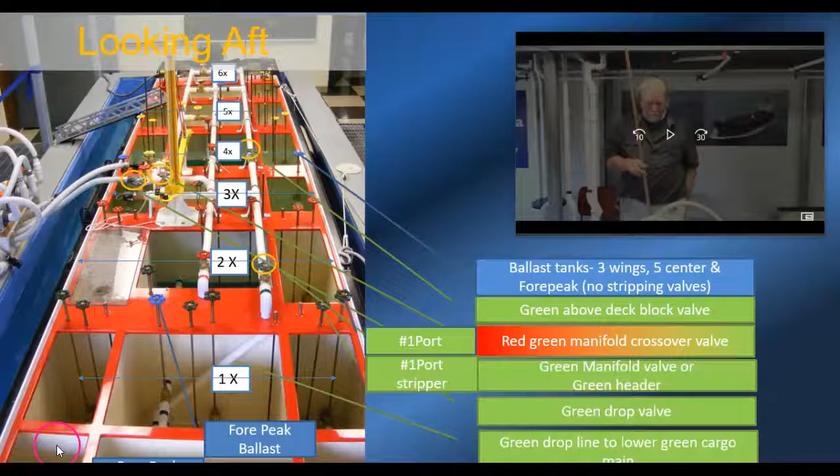Okay, so the first thing we're going to do is open up this valve here, which will supply pressure and allow the cargo to flow from the tank all the way up to this valve here. So again, thinking about pressure.

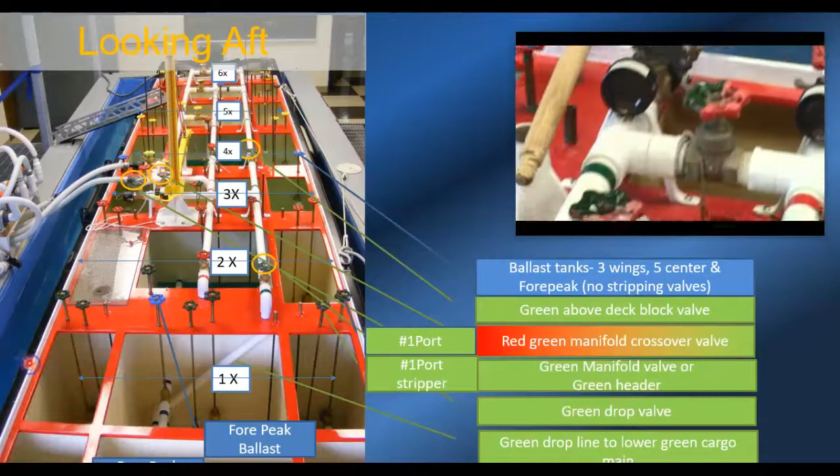Now I want that cargo to flow down through this section of pipeline next and get into here. This is my destination, 3 center. So think about every valve that it hits, because every valve it hits is going to affect the flow of cargo. So the first thing I have to do is open up this valve right here.

Well, it needs a name. We need to give this a name because I need somebody else to open it. I'm not just going to go up there and open up that valve myself. There's a couple of different things we can call it.

First of all, it's green, so we can identify it by its color. Or we can identify it by numbers, working from the bow to the stern, so that could be 1, 2, or 3. But I think you'll find that if you leave it as the green valve, you'll be okay. But the green valve isn't going to tell you enough. This is a specific valve, and it's called the header valve or the manifold valve. Either way, I don't care what you call it, as long as the team knows which one you're talking about. So try to stay consistent.

So this would be the green header. This would be the red header. That would be the yellow header.

Cargo cannot flow. This should actually be the last valve you open up before we start to move cargo onto the ship. This is the connection between the ship and the shore, so until you're ready to flow cargo, keep this valve closed.

So we open this valve. Now pressure is allowed to go shooting down the pipeline until it bumps into another valve. It's going to bump into this valve, come down through here, bump into this valve, and then bump into that valve. So remember, as soon as you open up the street to allow it to go someplace, it's going to go there until it meets resistance. And those valves are going to be your resistance.

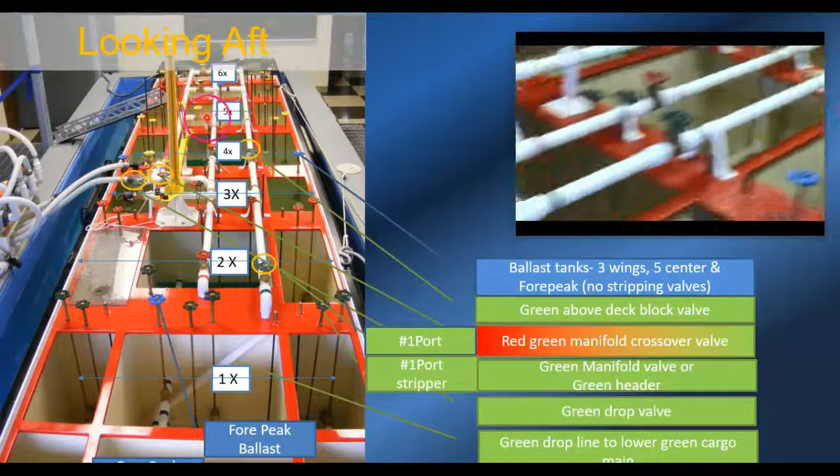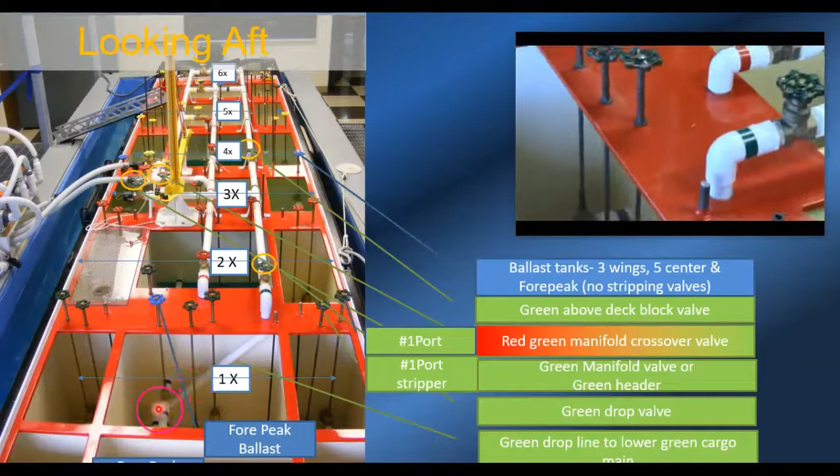Now, Rick, you're going to have a little bit of an interesting thing because we've got to look at this lower pipeline as it goes down through here. Why don't you put it on pause for a minute, and I'll bring the...

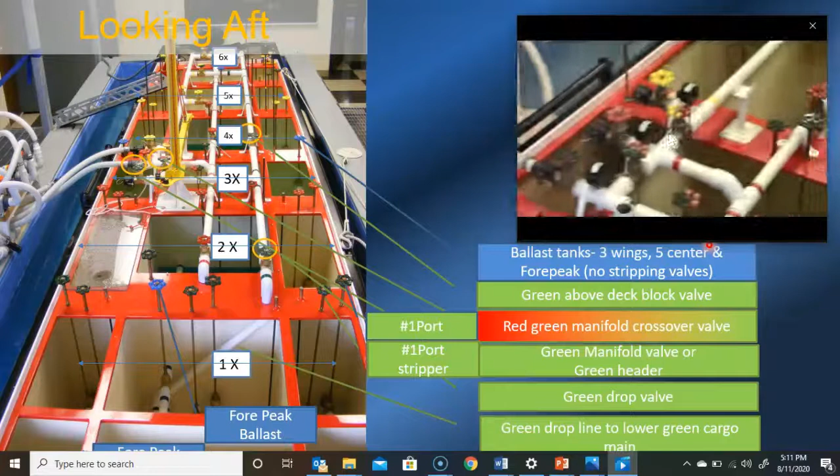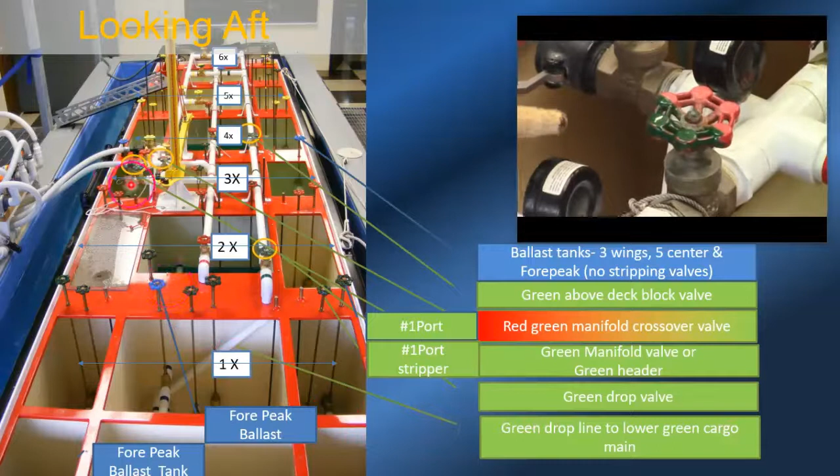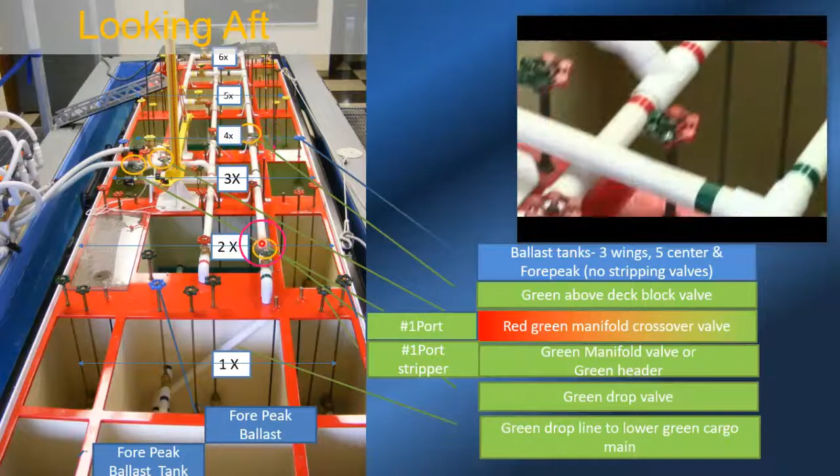So as a quick review, remember you're going to be coming in your manifold valve or header valve, green header, closing the manifold, crossover, red-green crossover, closed. Cargo comes up here, bumps into that valve over there, which is your green above deck block valve, forcing the cargo to go down through this valve, which is your drop valve, your green drop valve. As the cargo now comes down the green drop valve, you can see it goes into your lower cargo main.

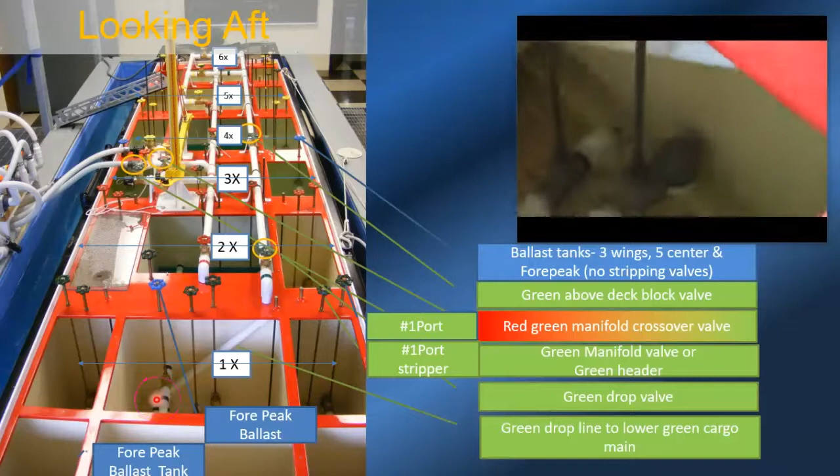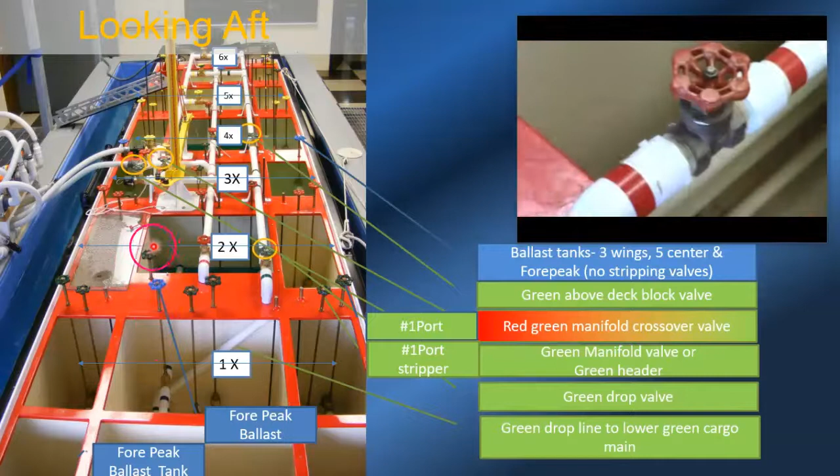Where is it? Right down through here somewhere. And the next valve it bumps into is this valve here. Maybe if you can scoot into this next tank here, you can see here's the cargo main here, and there's a below deck green block valve. It's controlled here, but the valve is down there.

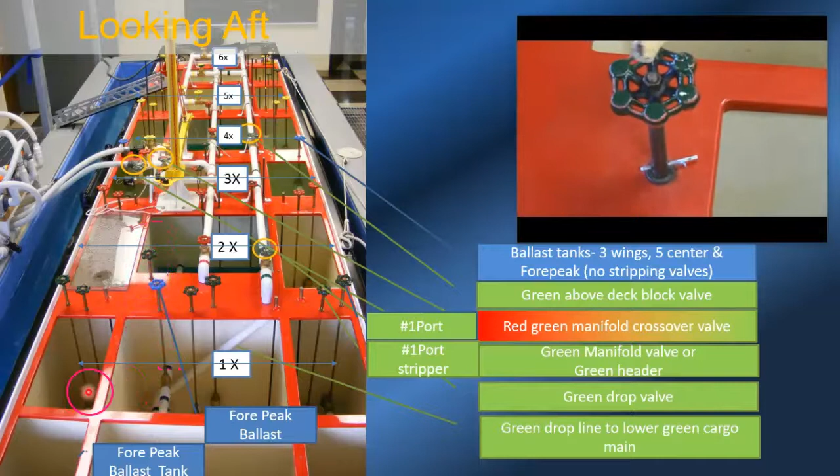By opening this valve, it allows now the cargo to come down your drop and go further aft. By keeping this valve closed, if I wanted to isolate the rest of the system back there, I could close this valve, but it would still allow me to open up these tanks up into number 1, so let number 1's fill up independent of the rest of the green tanks.

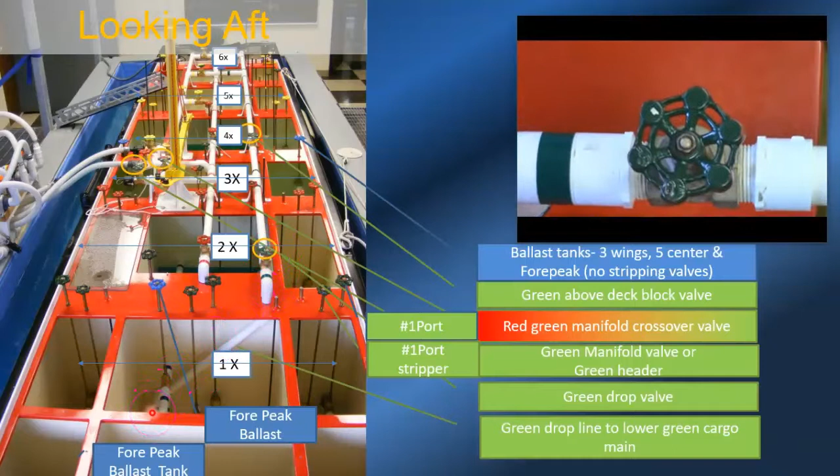So drop valve, and by the way, you know, these valves are going to be used for loading and for discharging, so what do we call them? We're going to keep this very, very simple. If I tell you to open up one port, one starboard, or one center, it's this valve. If you're loading or discharging, it doesn't matter, I'm going to call it the same thing because it does two things. It all depends on which way the cargo is flowing. So this would be your number 1 center valve, your number 1 port valve, your number 1 starboard valve.

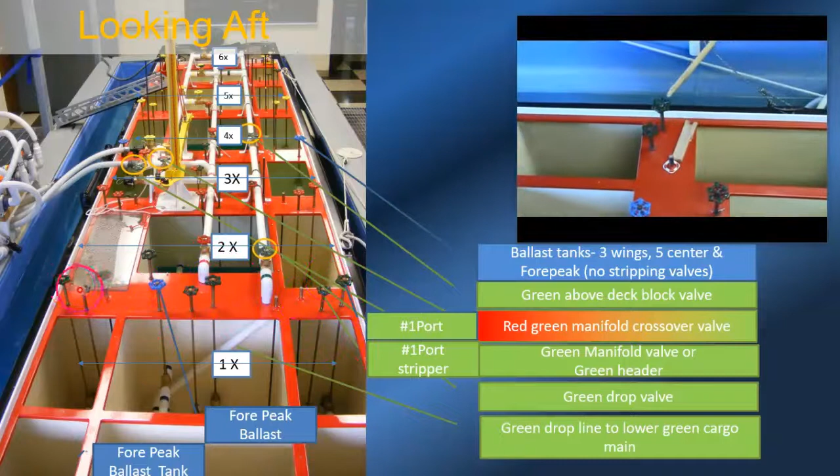And the smaller ones have to give it an extra little name because it's a separate little system. This is the stripping valve. So this would be number 1 starboard stripper, number 1 center stripper, number 1 port stripper. And that little stripping valve has its own little pump.